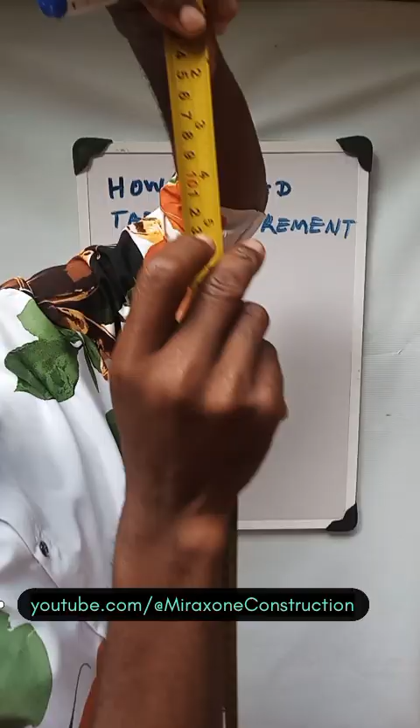This is 2 feet. So in the line of feet, there are inches: 2 inches, 5 inches, 10 inches. So they are being calibrated in inches this side and in feet.

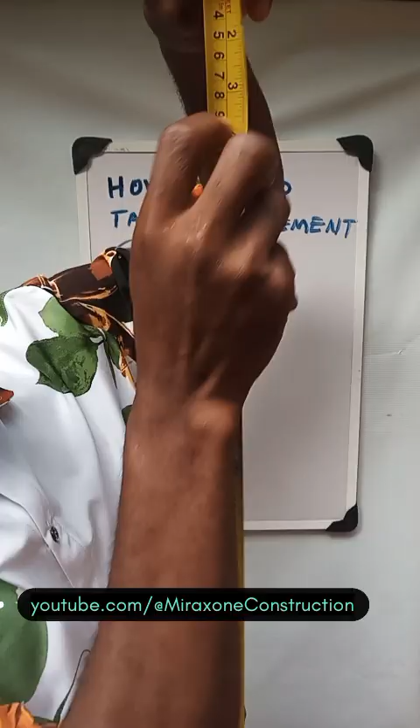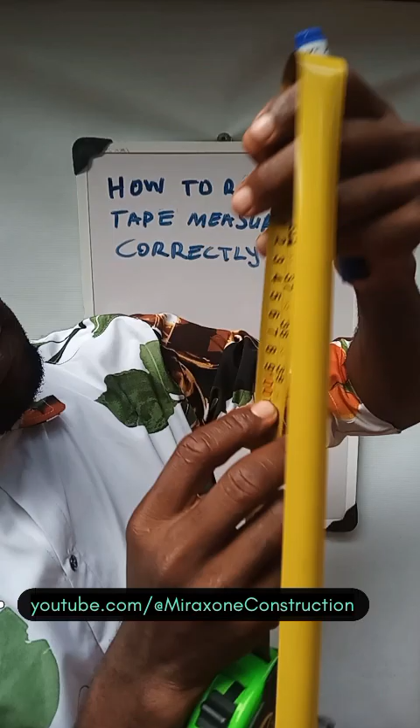This line, these ones are centimeter. They are being calibrated in centimeter: 10 centimeter, 20 centimeter, 25 centimeter, as the case may be. So in the line of centimeter and meter, you can still find their meters in the line of centimeter because 100 centimeter makes 1 meter.

So the first thing you have to note is you have to check and observe the calibrations of your measuring tape. If you cannot observe and check it very well, you'll find it very difficult to read your measurement. As a workman at site, this is the first thing you have to note.

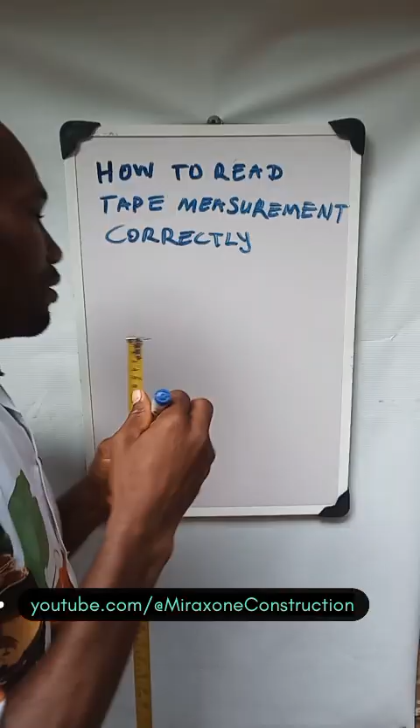As you can see in this tape measurement, this is 1 foot. Feet and inches are related. 12 inches makes 1 foot. That is, know your conversions very well. Let me write it on the board: 12 inches equal to 1 foot.

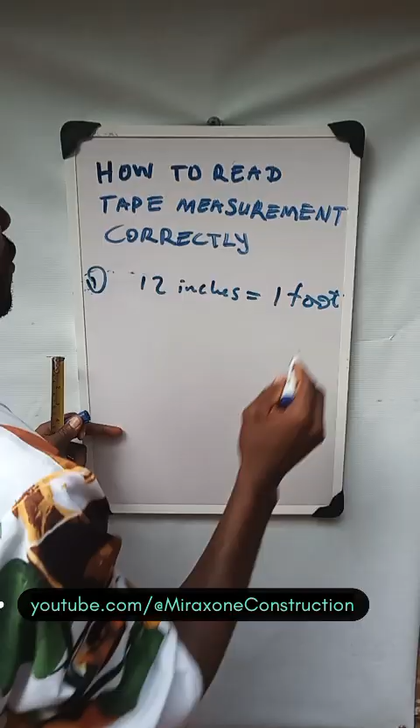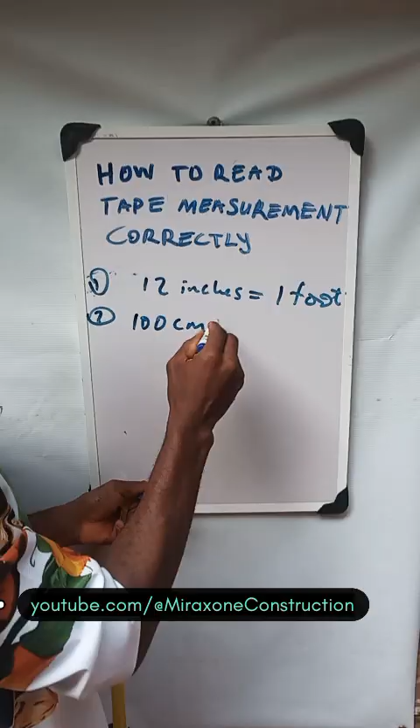Then the second thing you have to note: centimeter and meters. Know your conversion from one unit to the other. 100 centimeter, because this line are centimeters, 100 centimeter makes 1 meter. Please know it very well: 100 cm equal to 1 meter.

So you should know your conversions. Know your conversions very well. These are very, very important things you have to note.

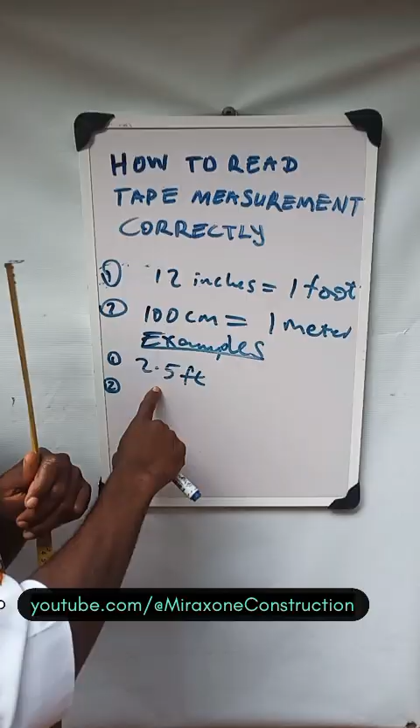Let us look into some examples on how to read these tape measurements at site or even at home. Maybe you want to take your measurements at home or at site. Let's look into how you can take the measurement accurately. Number one is 2.5 feet. How do you read it and take your measurement accurate?

Look at this tape. This one is 1 foot. This place is 2 feet. Then you count, these ones are inches: 1, 2, 3, 4, 5. What it means is 2 feet 5 inches, then it becomes 2.5 feet. Do you understand me? I hope you are getting it correctly.

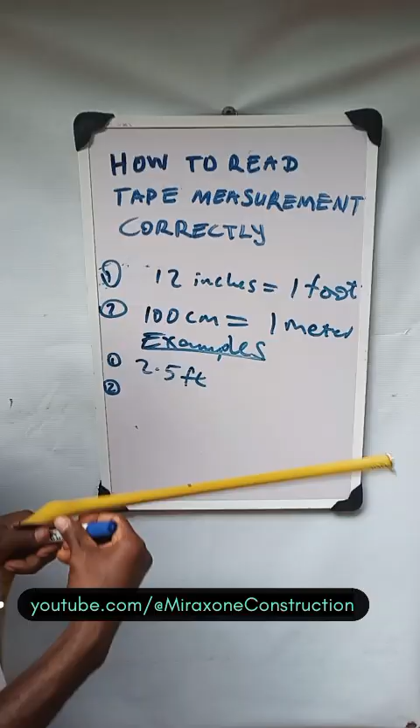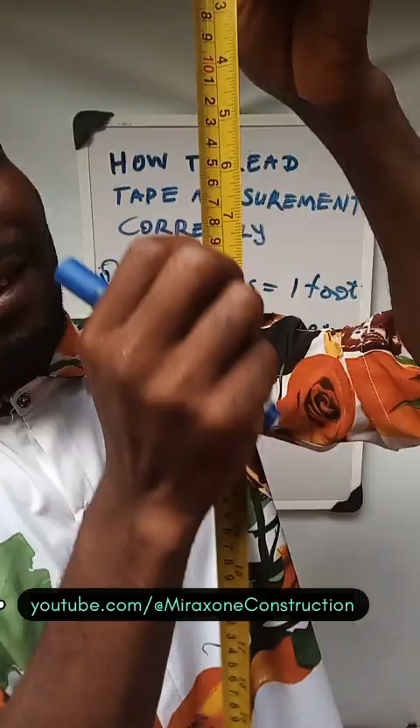Another example is 1.5 meter. How do you take 1.5 meter at site or at home or anywhere? These things I'm teaching you are very, very important, how to read your tape measurement correctly. For this particular type of tape, this side is being calibrated in centimeter: 20 centimeter, 30 centimeter, and 100 centimeter makes 1 meter.

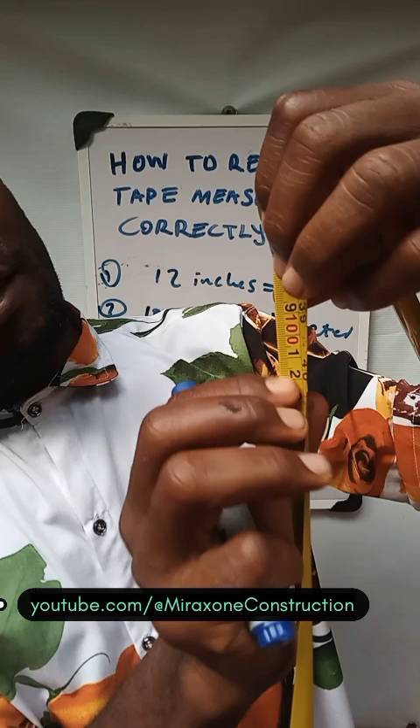So 1.5 meter, how do you take the measurement? Assuming you want to take your measurement correctly, this 100 centimeter here is 1 meter. Then go on, this 150 here is 1.5 meter. So these are the ways you have to take your measurement.

I want us to take the dimension of this board as a typical practical example. Maybe this board is one of your utilities at home and you want to take the dimension and send it to one of your workmen so that the person will construct something for you. So how do you take it? Maybe the person requires that you have to take the dimension in meters.

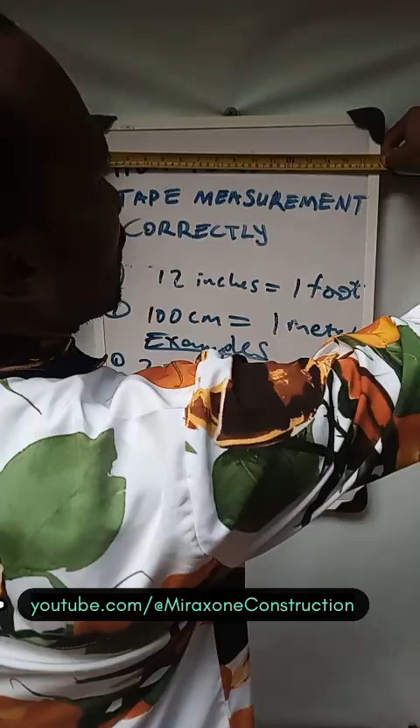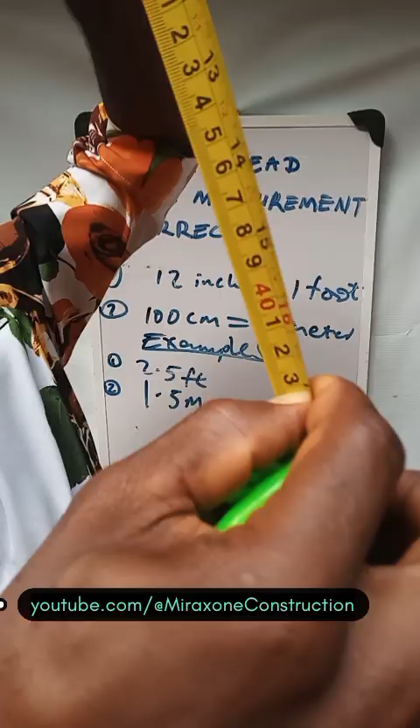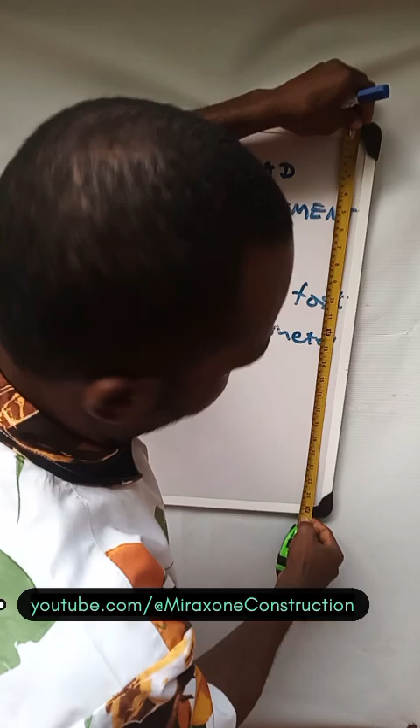So the width, I want you to read it for me: 0.43 meters. So this is this place. So the length, you can quickly take it: the length is 0.62 meters.

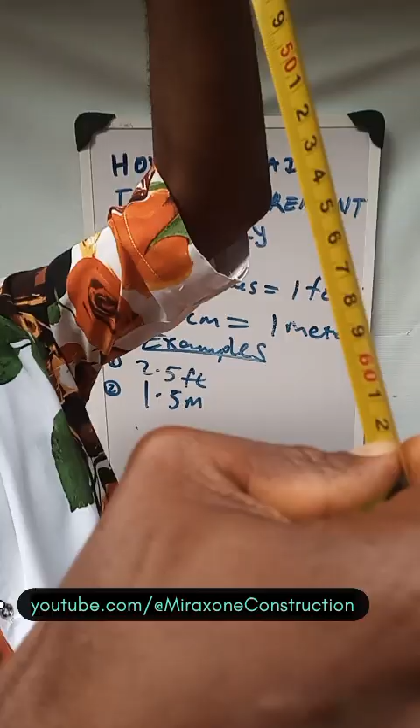So that is it, there's no other magic. These are the ways you have to take your measurement, accurate measurement at your home or at site.